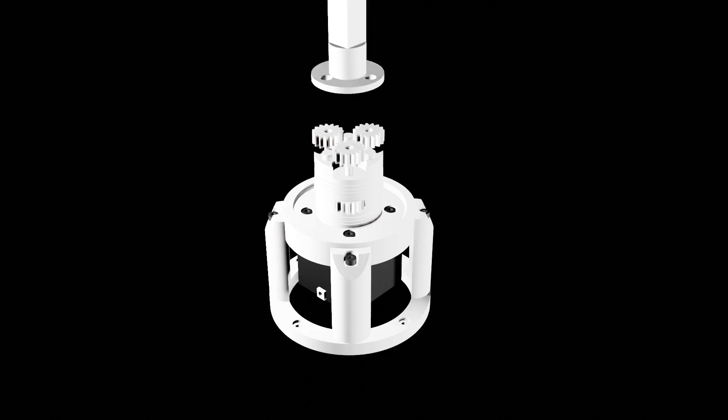Boas a todos. This here is a detailed guide on how to use the Planetary Gearbox OpenSCAD script.

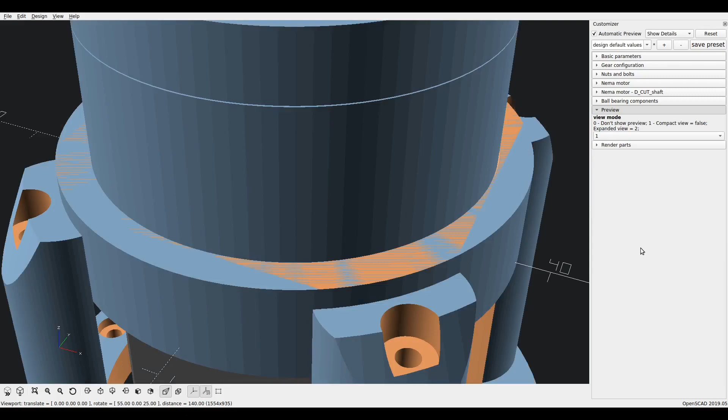When you first open the script on OpenSCAD, it will show you a blank screen. So come to the Preview tab and select Compact View. The compact view shows you a model Nema 17 attached to a 5:1 planetary gearbox. If you wanted to see an expanded view, select option number 2, and here it is. All the components that make up your gearbox, with the exclusion of the attachment.

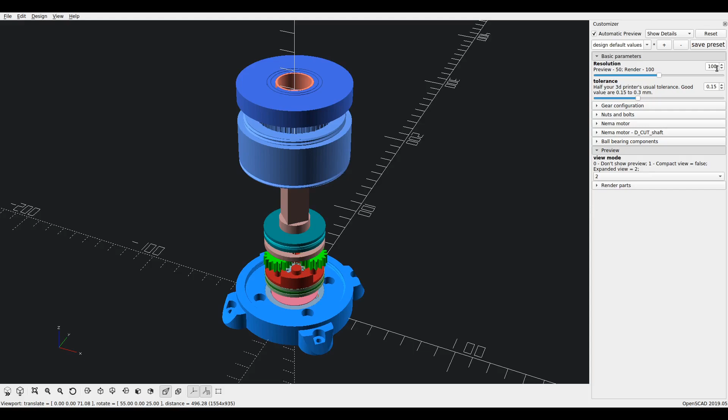Since you're just adjusting the settings, I suggest that you go to basic parameters and reduce the resolution of the model from 100 to 50. You can even reduce it to less in case it's kind of slow. Next, adjust the tolerance. This is half your 3D printer's tolerance for the material you're using. It's optimized for ABS, so try it out.

Next tab is Gear Configuration. Basically, these first 3 settings help you set up your gear ratio, so number of teeth on the sun gear, the planet gear, and the ring gear. If you're not familiar with planetary gears, you can go to the website I provided you guys, and it simulates a planetary gear. So make sure that it's solved for planets and carrier. Reduce the number of the planets to 3. By default, the gearbox has 3.

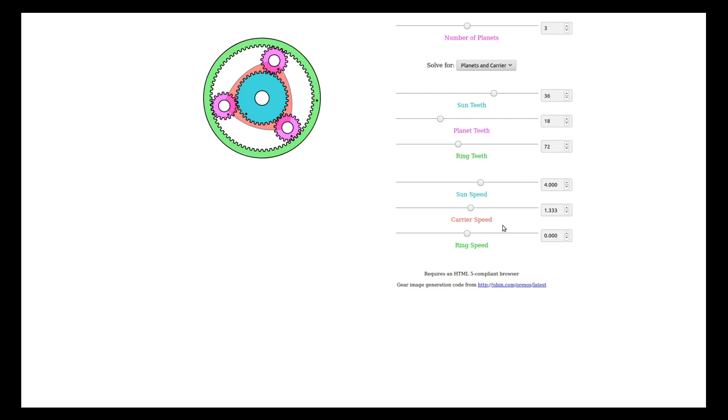Then come down here and look at the ring speed. It should be -1, just increase it to 0, so the ring gear stays put. Next, let's say you wanted to simulate a 4:1 gear ratio, right? So the sun gear should spin 4 times, and the carrier should spin only once. At the moment it is 1.333, right? So let's adjust this. Let's reduce the number of ring teeth to say something around 40.

Let's mess around with the number of sun teeth. Okay, I'm getting close. And there it is. 12 teeth on the sun gear, 12 teeth on the planet gears, and 36 on the ring teeth gives you a gear ratio of 4:1.

The best gear ratios for a planetary gearbox are in between 4:1 and 6:1. The reason for that is once you start approaching, say 2:1, or on the opposite 10:1, the sun gear or the planet gears just increase and decrease in size too much. Let me just try to show you 10:1, right? For me to achieve a 10:1, here it is. See the size of the sun gear? It has only 4 teeth and it's minuscule. If I were to try a 2:1 gear, the opposite would happen.

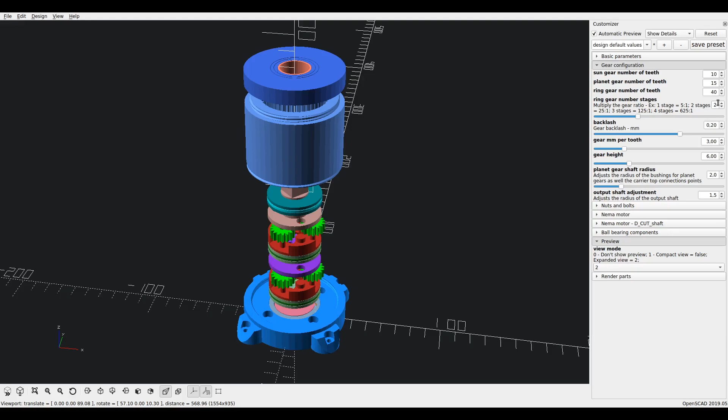Next is the ring gear number of stages. Basically, if I were to need a 25:1 gear ratio, I will just increase the number of stages to 2. See here, 2 planetary gears stacked, and it can go up all the way to 4 stages. In this specific case, this would be a 625:1 gear ratio.

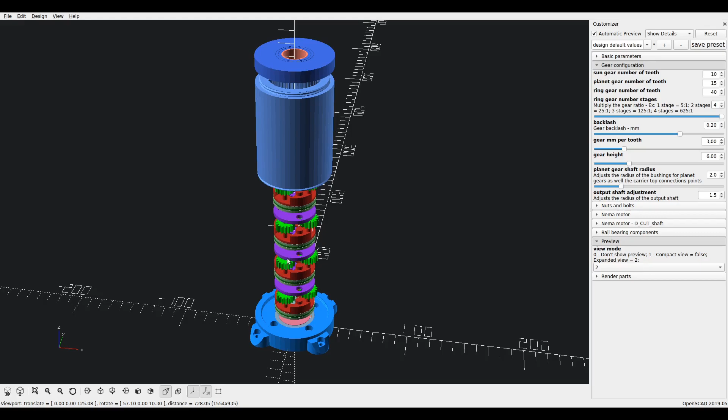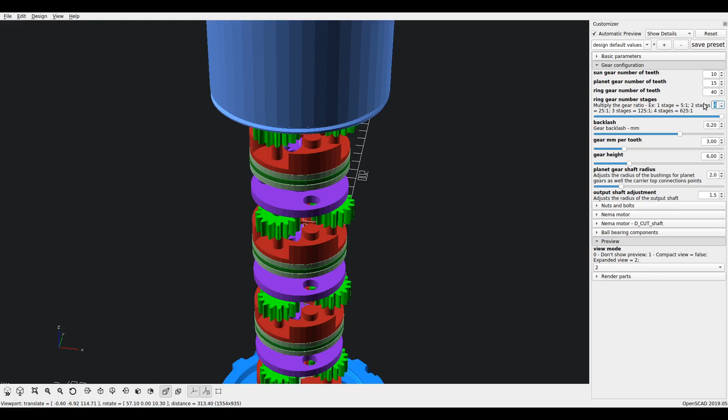Next comes the backlash, or the gear backlash. This is basically a small gap in between the gear teeth that helps the gears mesh correctly without binding up. A good value to start at is 0.2 millimeters. You can decrease it a bit if you want, though this is an optimal value. Let me just decrease this to 1 so it renders faster.

Another important value is the gear millimeter per tooth. This adjusts the size of the gear teeth here. You can increase it in size, say 4 millimeters, and in so doing it adjusts the whole model and even introduces a few bugs. So I'll show you how to fix that. But this here is a very important value.

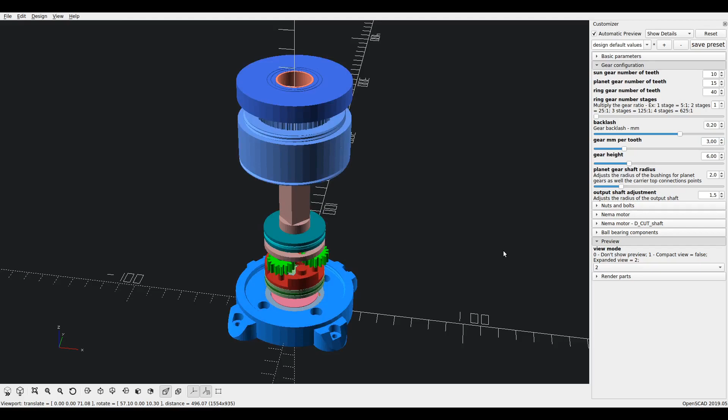Another value is the gear height. It shouldn't be less than 5 because it will start to clip in a few models, but 6 is a good value. You can also increase it to say 8 if you're working with a more powerful motor, for example.

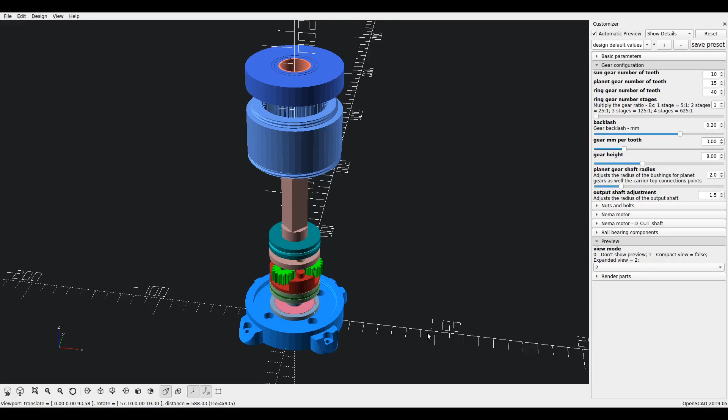Next setting is the planet gear shaft radius. Let me see if I can zoom in. The planet gears rotate on a carrier here in red, and all 3 planet gears rotate on a bushing. The bushing size is adjusted by the planet gear shaft radius, as well as these output shafts that connect to

the next stage. So if you were working with a smaller motor, you might want to make these smaller, and if it were a bigger motor, just increase it in size so that, for example, these shafts can transmit the torque properly without snapping. Let me show you a few examples of what I'm talking about. See, increase in size. Just be aware that these model cylinders don't start clipping on the planet gears. It's quite easy to see what the issues are.

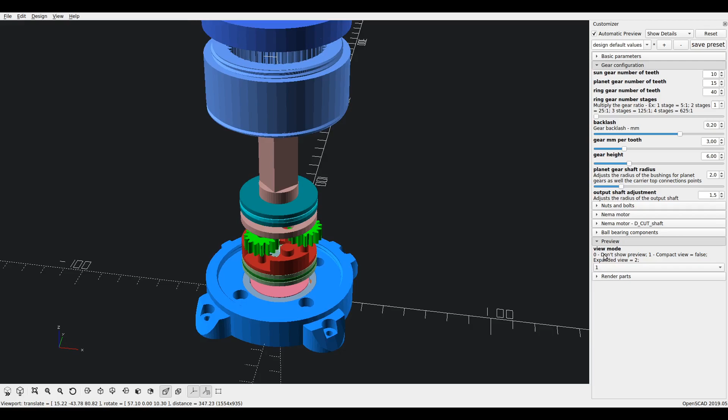The output shaft adjustment is just a small ratio that helps you make this shaft bigger or wider or smaller if that's your need. For example, let's decrease it in size. See? I believe it's 1.5, the default.

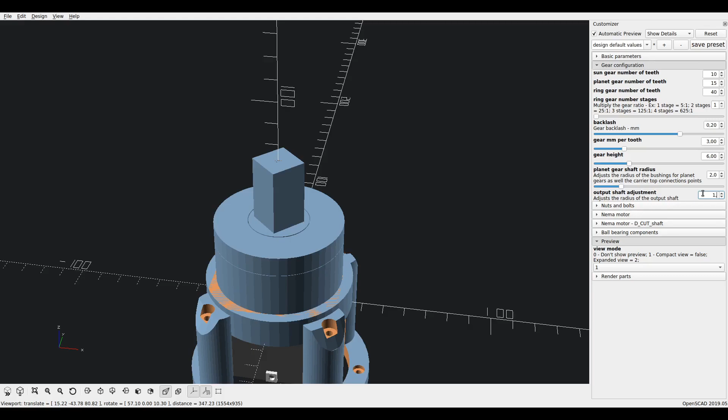The next step is nuts and bolts. This is pretty much self-explanatory. Screw size gives you the size of the screws as well as the nuts. By default, I'm using M3 screws and nuts, and the screw length is the size of the threaded part of the screw that goes in here.

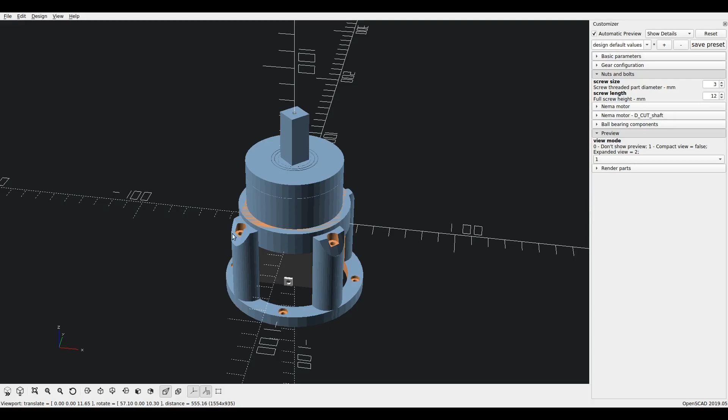Another important tab is the Nema motor. This script is designed to produce gearboxes for a range of stepper motors, and it supports from a Nema 11 all the way to Nema 34. By default it's optimized for Nema 17, so you need to do a bit of tweaking for some of these values. Later on I'll show you a few examples.

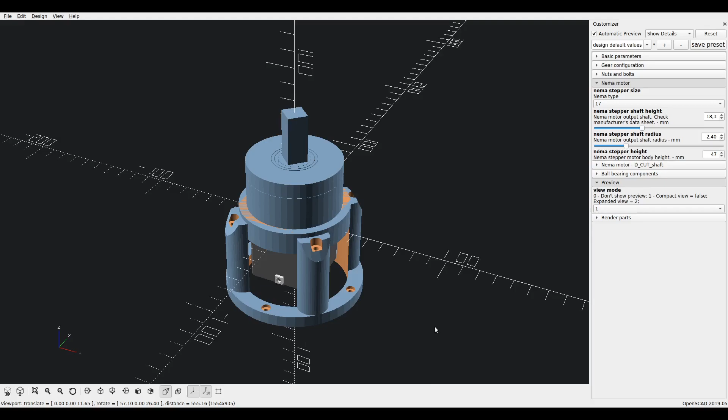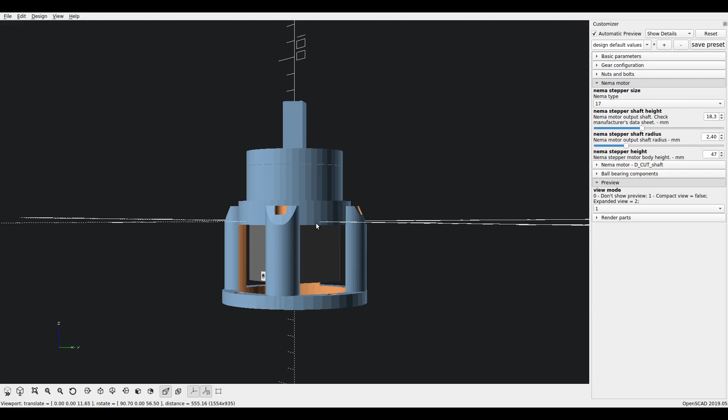Nema stepper shaft height and Nema stepper shaft radius refer to the motor's shaft parameters. The Nema stepper height is the height of the stepper motor. This stepper here isn't modeled accurately, because the Nema stepper height gives you basically the height that goes all the way from the bottom of the planetary gearbox to the bottom of the Nema plate. That is this model here. You'll see what I mean.

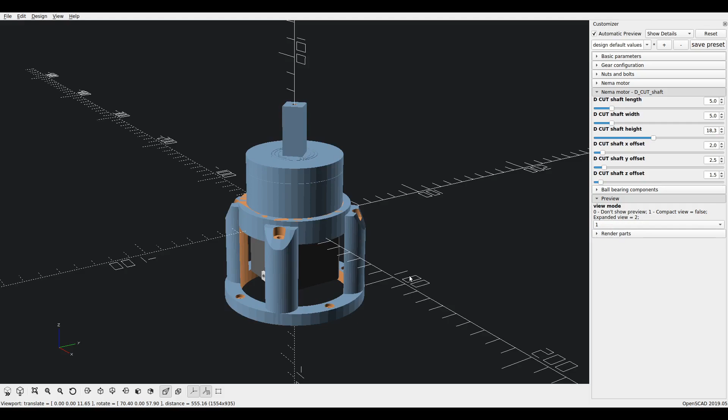Next comes the Nema motor D-cut shaft. Most stepper motors have, let me just show you, a shaft like this. It's cylindrical to a certain height, then it's sanded flat on one of the faces, making a D-shape cut, right? Okay, let me just see if I can show you guys.

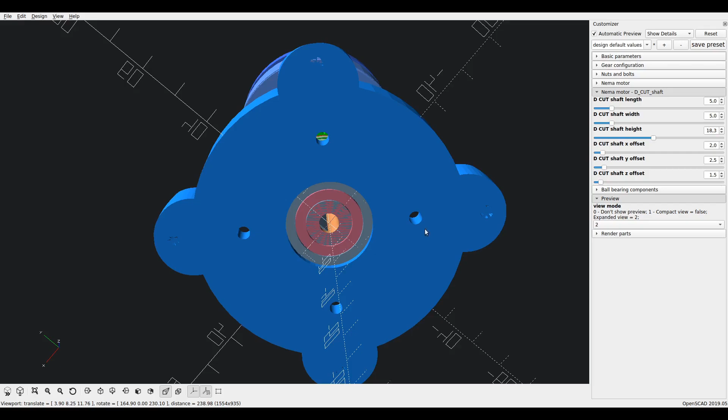The shaft goes here. So inside this, it's called the Nema gear or the sun gear. I can't see it properly, so let's render just the Nema gear. Oh, here it is. As you can see, there's a small height adjustment for the bottom of the shaft that's cylindrical. Then there's a D-cut shape there, right?

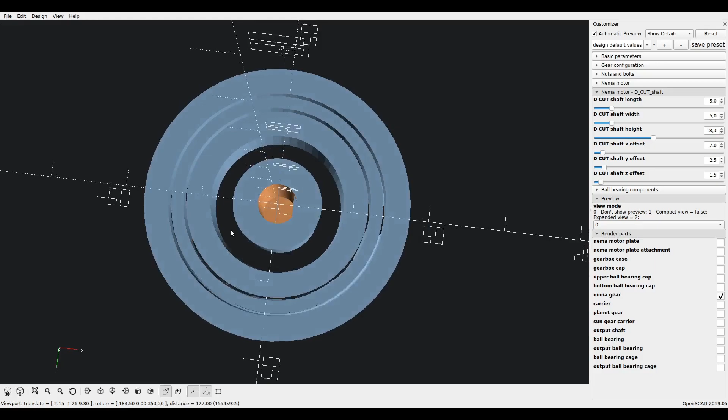To produce this D-cut, it's modeled as a cube operating in a boolean between the sun gear and the shaft inside, right? So let me just show you. Let's move the cube to the center. So shaft x offset is 0. See, it's centered. I can make this a bit more obvious. Let me just decrease the width of this cube, say 2. Okay, it's off-centered. Let me adjust the y offset to half the width of the D-cut shaft. So 1 millimeter. There it is.

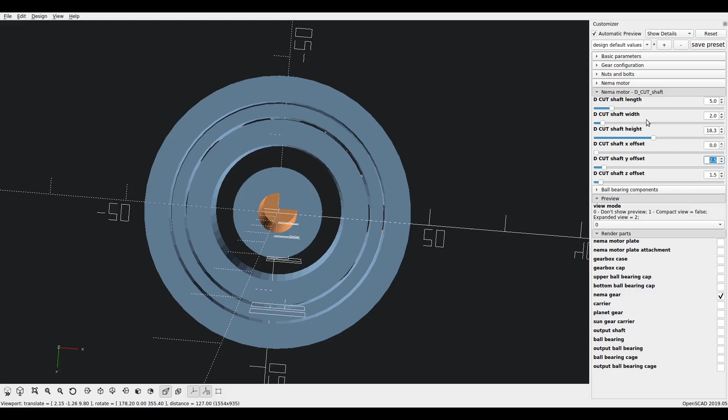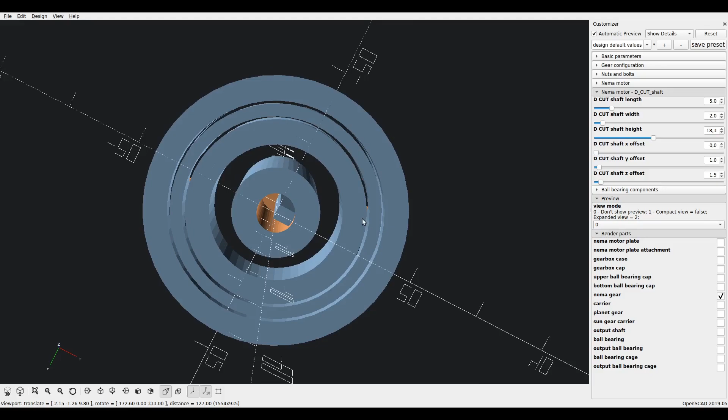See? I'm rendering a small cube. The cube's length corresponds to its size on the x-axis, the width to its y-axis, and the height is basically the height of the cube, right? The x offset just moves it away from the origin by a certain amount, in this case 2 millimeters, and the y offset is a way for you to center the cube, so it's half the width's size. So change to 5, and this should be 2.5.

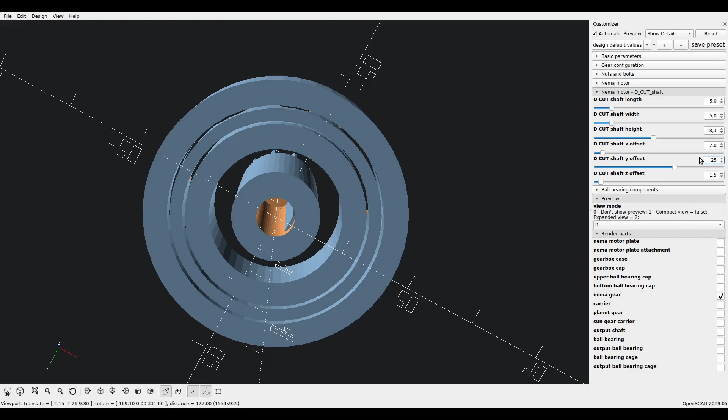The last is the D-cut shaft z offset that lets you adjust the cube's height. So it's 1.5 millimeters from the bottom. I can increase it to, say, 3. See? This is how you model the D-cut. It's different from stepper motor to stepper motor, so get out your calipers. I believe that's the name.

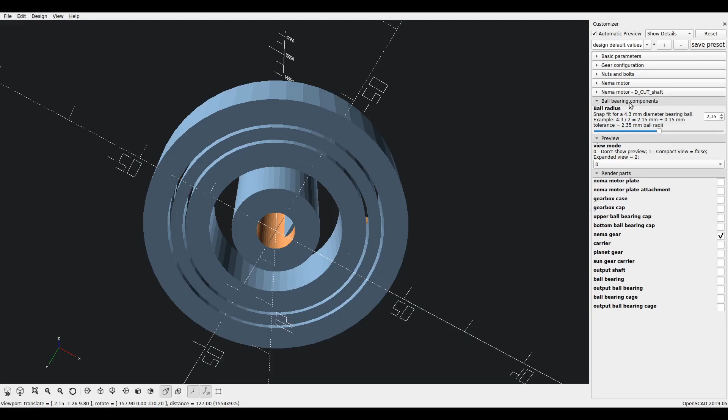Next tab, ball bearings. As you can see, some of these components have integrated ball bearings.

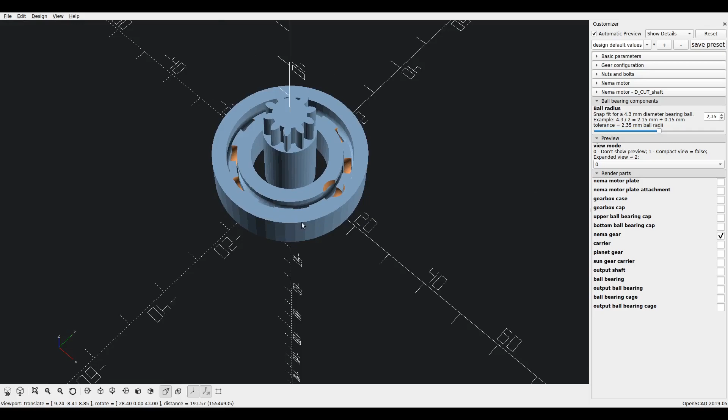If you're not familiar with the design, I've also published a small parametric ball bearing code on Thingiverse, where it explains in detail how you can assemble these, as well as fine-tune its operation. But basically, you go to any big sports goods shop and look for steel ball bearings. You can find them as ammunition for air guns. They're about 4.5 millimeters in diameter, more or less, and you can buy a flask of, say, 1,000 for €5. It's pretty cheap.

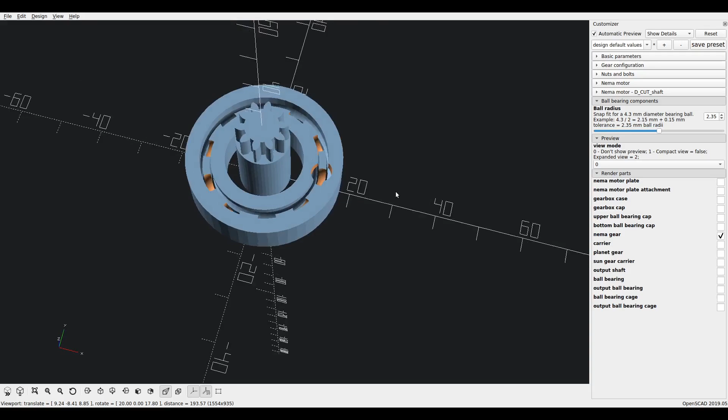Then you can adjust the ball radius so it's a tight fit, but it doesn't bind up. Here, though, be aware that this value here is the ball radius, and you have to add up a certain tolerance. The tolerance you inputted up here isn't reflected on the ball radius, so it's manually adjusted. In this case, I found that the best radius for my balls was 2.15 millimeters.

Then I added 0.15 millimeter tolerance, and the math's wrong. The balls will probably be 2.3 millimeters in radius, so it's 2.35 millimeters. You need to fix this though.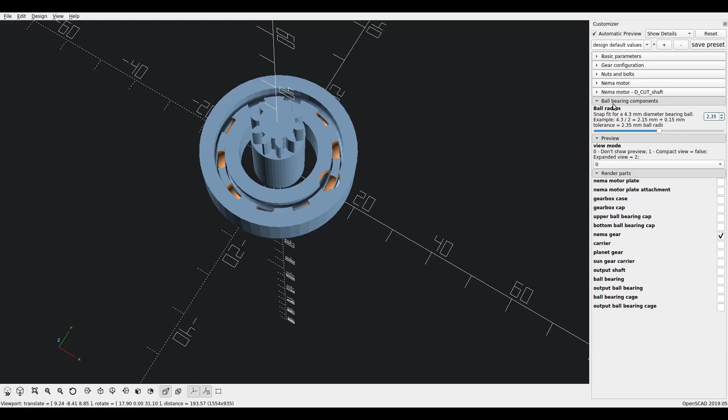The last I've shown you is how to render the individual parts here. Just select them, change the basic parameter resolution up to 100 and hit F6 to render it. If you want to speed up the final rendering process, you can open various instances of OpenSCAD and just render manually each new part.

If you wanted a more hands-off process, just send me a message and I'll try to get you a small script that will generate all the pieces of your gearbox automatically.

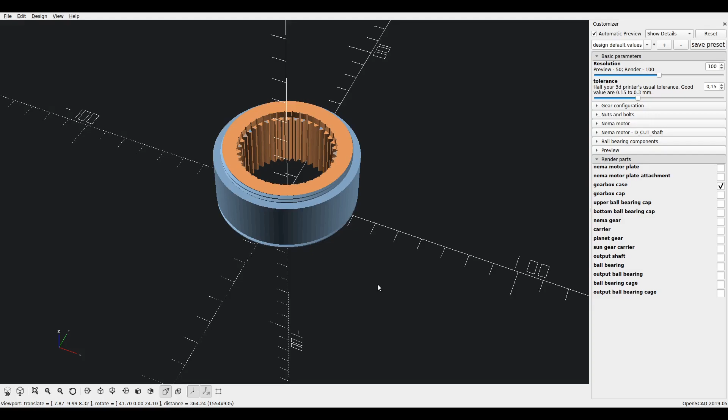Okay, these here are all the basic settings, and I wanted to show you also a few examples of how you would generate a parametric gearbox for, say, Nema 14, right? So Nema 14, let's display a compact view, come to the Nema Motors tab, select Nema 14. Okay, as you can see, there are a few bugs here, a few errors.

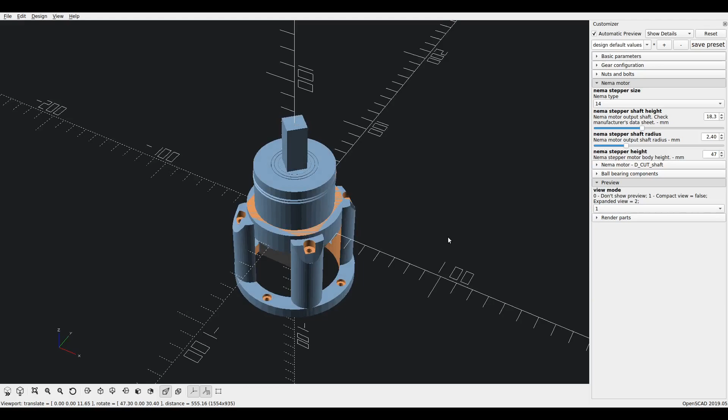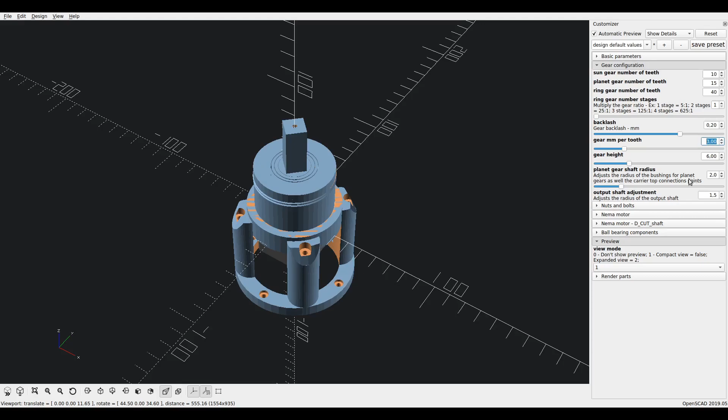Next setting you need to adjust after these here: Nema stepper shaft, height, Nema D cut, everything else. Come to the gear configuration and adjust the gear millimeter per tooth. Since this is a smaller motor, let's just decrease this value from 3 millimeters to, say, 2.4. Okay, that seems nicer. Let's just open it up and see if there's any issues with some of the parts.

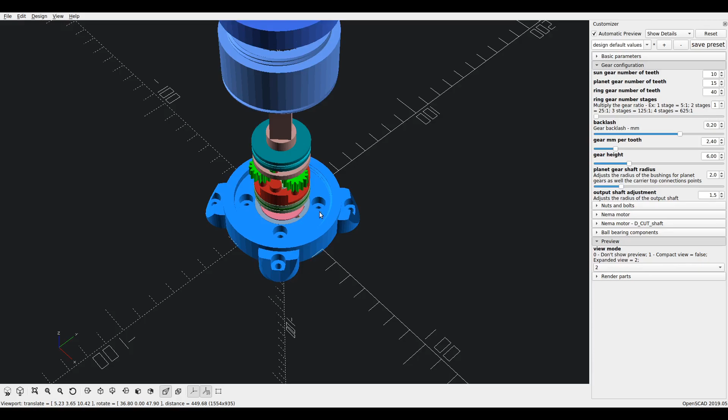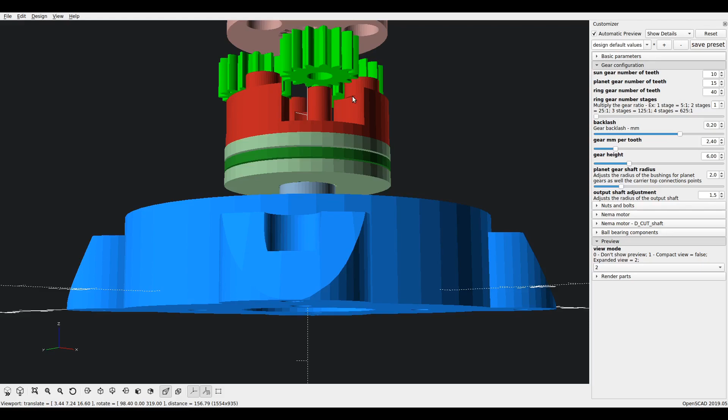There's no gap in the Nema gears. The holes for the screws that attach the Nema motor are well defined. The bushings and the outputs on the carrier are a bit too wide. Let me just zoom in so I can show you. As you can see, it's slightly overlapping with the planetary.

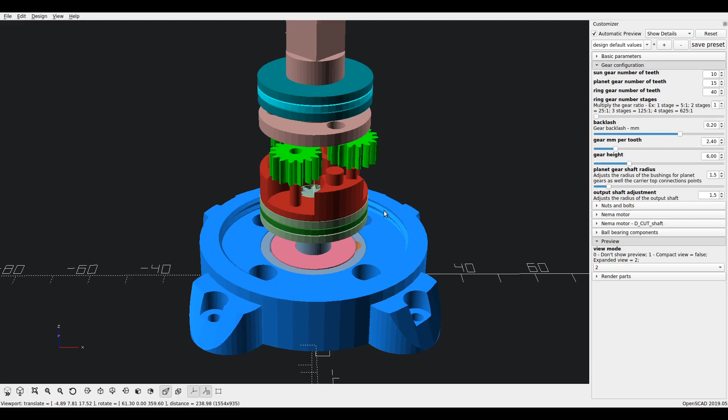So come to the planetary gear shaft radius, and let's reduce it to, say, 1.5. Okay, that's better. And if you want, by default this is the 5:1 gear ratio, but let's add another stage and see if any other bug shows up. Nope, everything seems more or less fine.

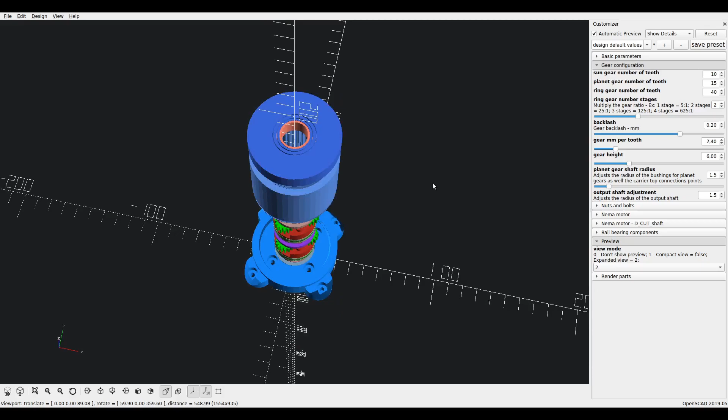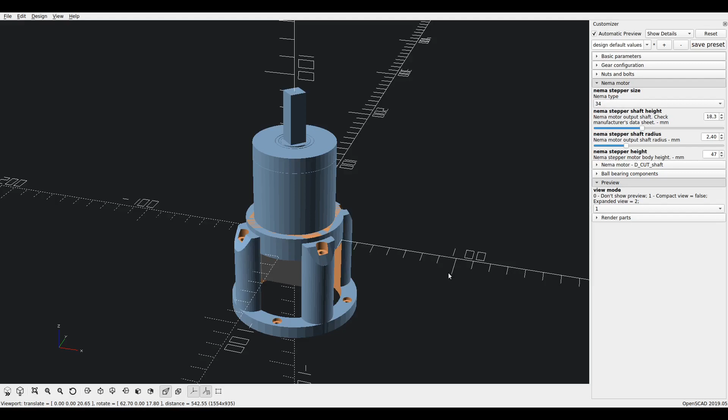Now let's suppose that you wanted to model something for a Nema 34. Now that's a big motor, right? So Nema 34. And as you can see, there doesn't seem to be too many issues. Just ignore the Nema motor on the underside here. It doesn't display accurately.

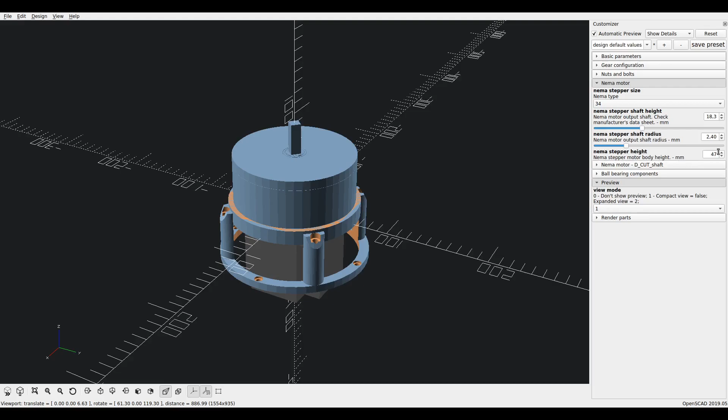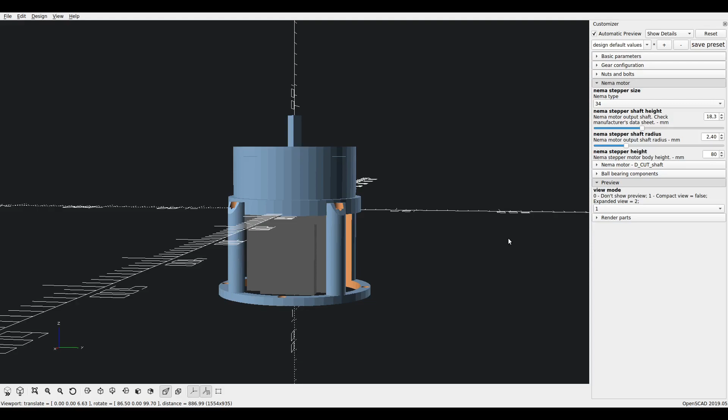So if you want, you can just adjust this to a bigger value and see what happens. Whatever. But be aware that all the stepper motors have different heights. This doesn't set it up properly. Okay, the output shaft is a little tiny. We'll have to adjust that.

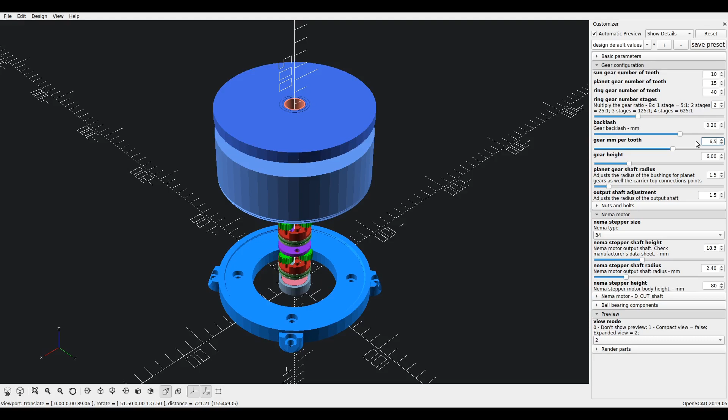Let's open it up, and there's a big issue here. The Nema plate is missing a lip, and it's too wide, right? It's supposed to have a small brim here. So let's go to the gear configuration and change the gear millimeter per tooth for a bigger value, say around 6.5 millimeters. Okay, that seems to have solved the issue.

The gears are a bit too small. Let's just increase them in height. Say, I don't know, 9 millimeters. Okay. Maybe a bit more. Say 11. Now that seems decent. Now you can see it very well. Let me just adjust this.

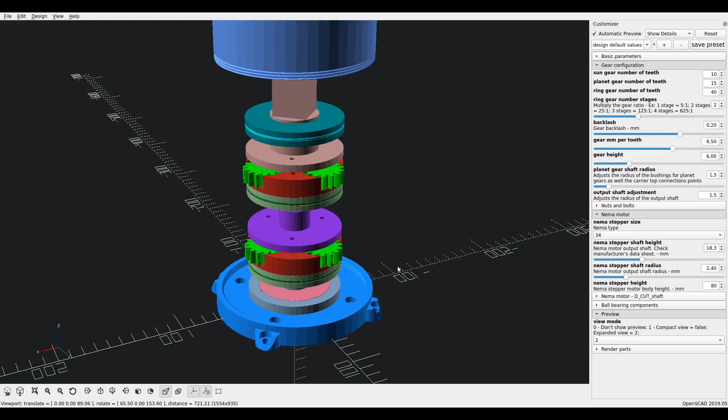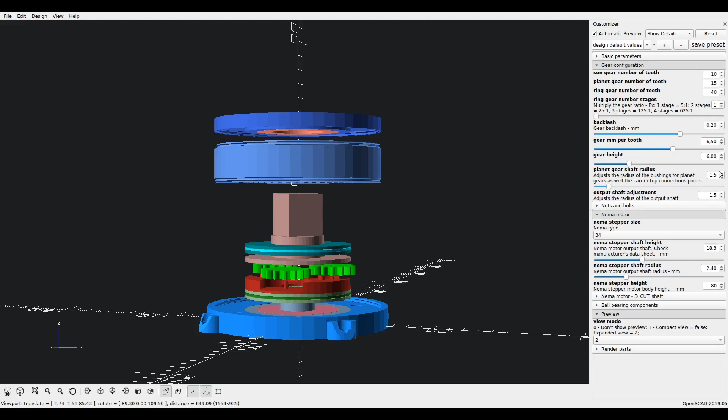But the bushings and the carrier outputs are a bit too small, right? They're too fragile. Just adjust a few of these values. Okay. See? So planetary shaft radius, let's increase this to, say, I don't know, 3 millimeters. It can go a bit more than that, 4. Okay, 4 millimeters seems fine. Okay, let me just put 12 millimeters on the gear height.

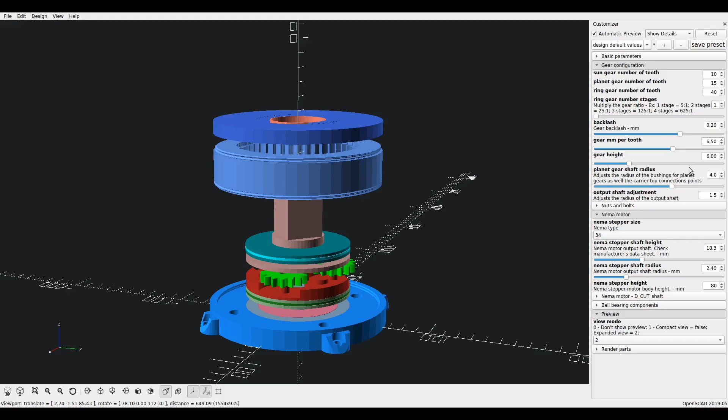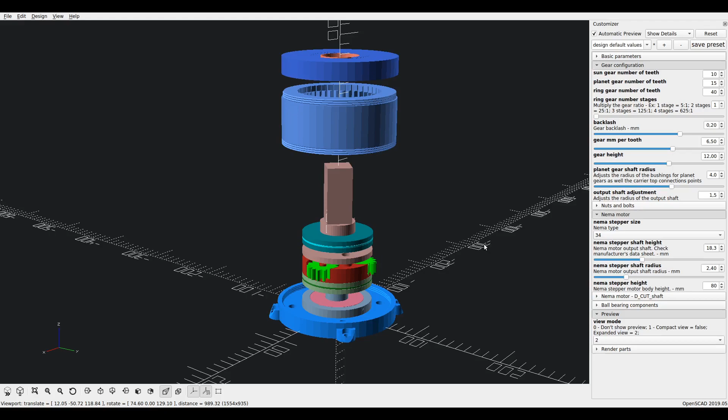And everything seems to be working out okay. Let me just show you a final piece. Most errors that crop up will be here on a Nema motor plate. By default, the screw holes should be well defined, and there should be a small brim here. So let me show you what I'm talking about. So 3 millimeters. See, the brim disappeared.

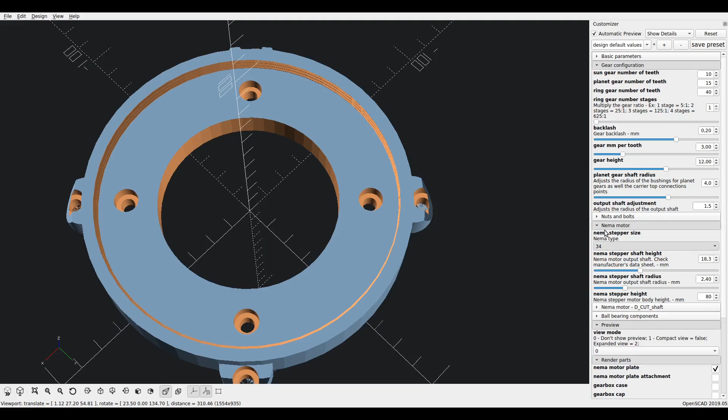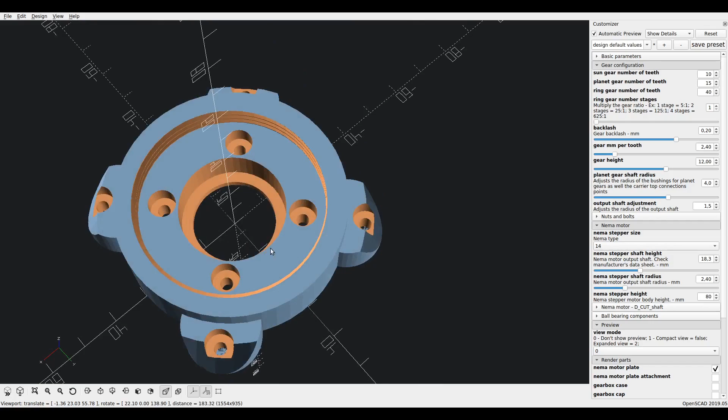Now while working with Nema, say 14, right? There's a brim, and it's interfering with the screw holes, right? So the gear millimeter per tooth should be lesser than this. Okay, these are pretty much all the issues that you'll probably find yourself running into.

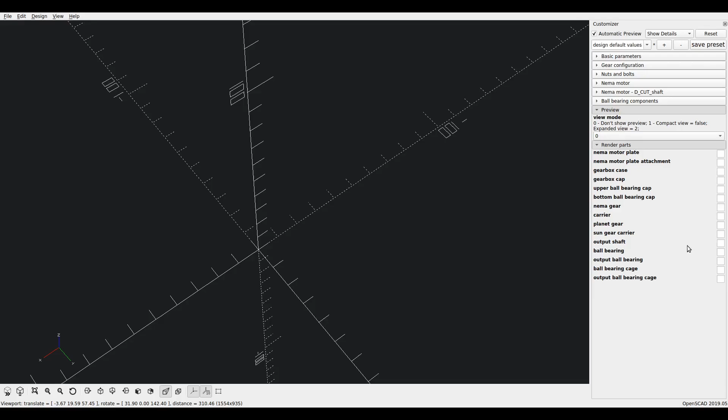If for some reason you need to edit the code, say you wanted to model, oh crap, let me just reset the settings here. Say you wanted to make a triangular shape here on the output shaft, right? Whatever. Then you'll go to the code. Let me just show you how the code is set up. Okay, I'm just using a text editor for editing this code. It's Emacs if you're not familiar with it.

There are a few tips here. You can read them if you like. There are a couple of bugs that you might encounter. On the basic configuration, these are all the settings that are in the OpenSCAD customizer. There are a couple of hidden settings here. On the advanced configuration, sorry, I've lost myself. Okay, here it is, advanced configuration.

The gear twist, this is something that's not fully implemented. It just enables you to generate helical gears, but it's weird. If you wanted to work with these, this is where you would adjust. It's an angle. One important variable that you might want to mess around with is the warp factor adjustment.

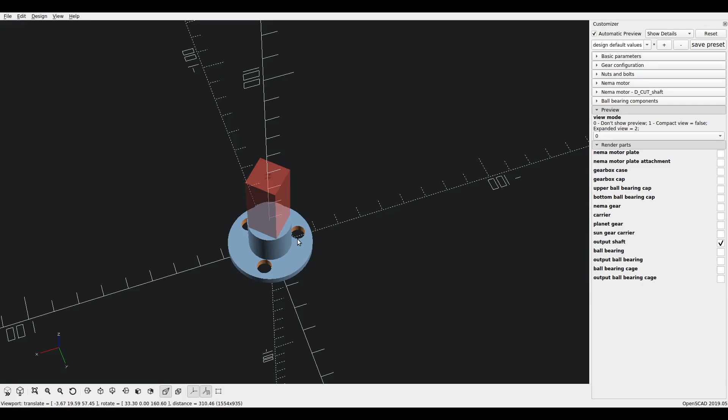And as you can see, this is a boolean difference of create main attachment body, and it's drilling a small screw hole, right? So it's applying a 40-degree rotation, and it's translating for a set amount. This is parametric by nature, so the height is the gear height, and here is the cube that's modeling the shaft. So you'll just need to delete this piece of code, generate your triangle, and just extrude it on the Z height, for example, according to your parameters.

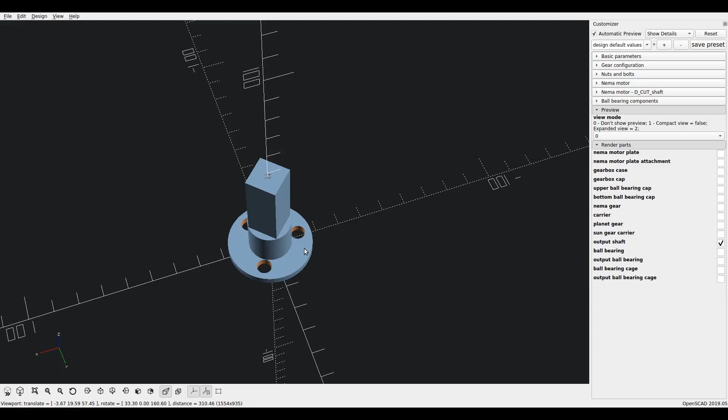And this is pretty much it. If you have any issues, or if any sort of weird bugs crop up, just send me a message. I really don't mind.